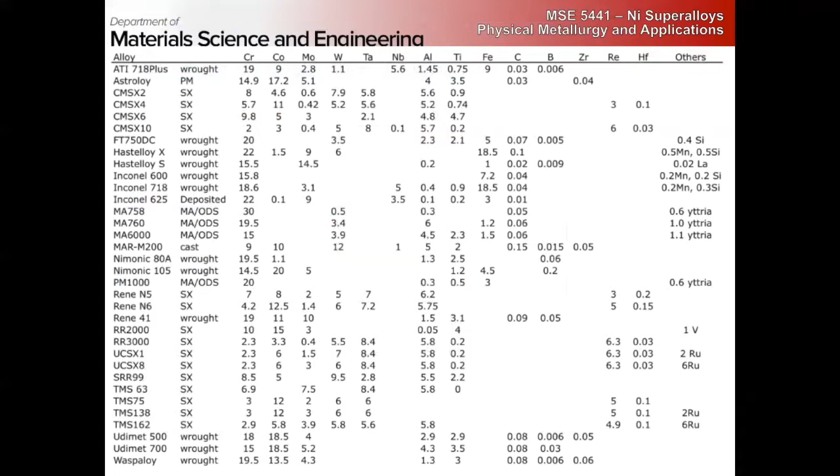It generally also doesn't contribute very much to the formation of carbides, which is also confusing, being that titanium and hafnium, which are also group 4 hexagonal metals, are very potent carbide formers here as well. So I need to wait for Professor Mills to get back from MRS and ask him what the deal is with zirconium in superalloys.

But we do know that it does segregate to grain boundaries and is important for additional creep strength because it lowers the grain boundary energy. Carbides are also very important for high temperature creep strength.

So there's added carbon at very small percent where they'll combine with the refractory elements and form these blocky carbides on the grain boundaries, that during service and heat treatment, they'll form lower carbides such as M23C6 and M6C, which form on the grain boundaries. And these are all based on the FCC crystal structure.

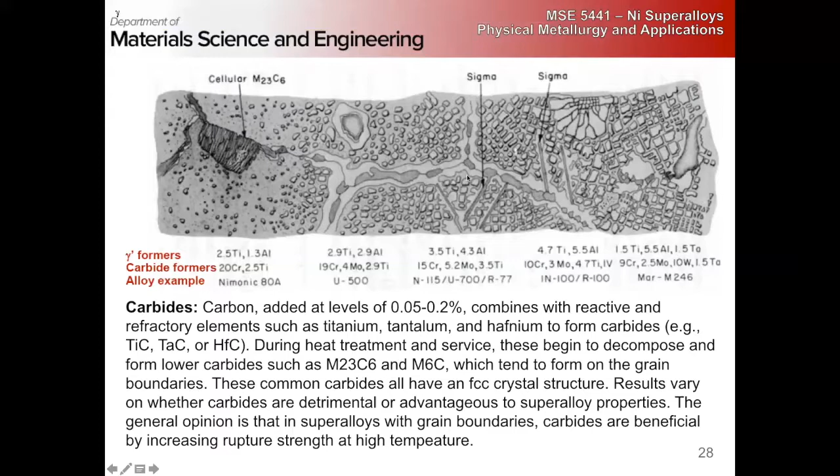So they can be fairly coherent. They are beneficial at high temperatures because they lead to the formation of these serrated grain boundaries, which are very favorable for creep.

Because at high temperatures, grain boundary sliding and grain rotation are critically important creep rate controlling mechanisms. So if you have a tortuous grain boundary like this, you do not have nearly the ease of grain boundary sliding.

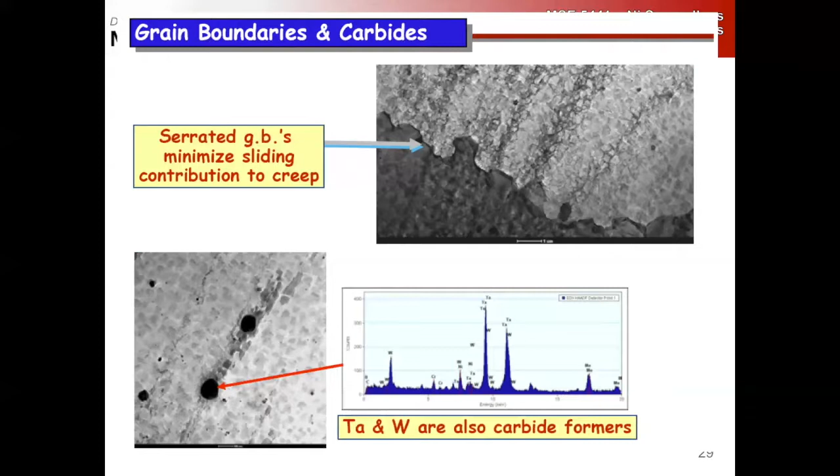So in the gamma matrix itself, we are primarily adding alloys for solid solution strengthening. And this basically just shows you for different elements a schematic of the increment in yield strength due to them being in solid solution.

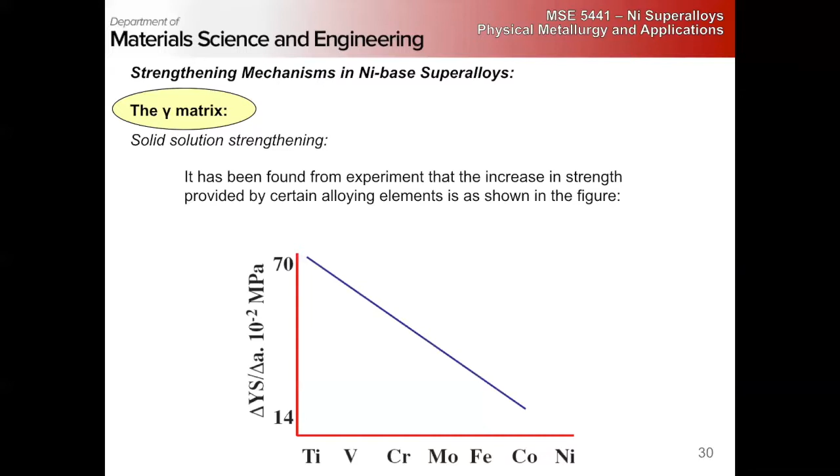And there's some empirical relationships that you can use to determine the effect of strengthening as a function of the alloy composition. And if we remember back to the very beginning, we know we have two main effects for solid solution strengthening: a lattice mismatch, lattice size effect, and also a modulus effect.

And we can look at the change in lattice parameter for all the different elements, and we notice something really interesting here. If we look at aluminum...

Aluminum is predicted to have the largest effect when you take the modulus effects into account as well. So in principle, aluminum would be a great solid solution strengthener for the gamma phase. The only problem is, where does it go? It partitions to the gamma prime.

So even though it's there and very potent, it is really added for its hardening purposes rather than its use in strengthening the gamma phase. That means tungsten, molybdenum, and chromium are primary solid solution strengtheners to the gamma phase.

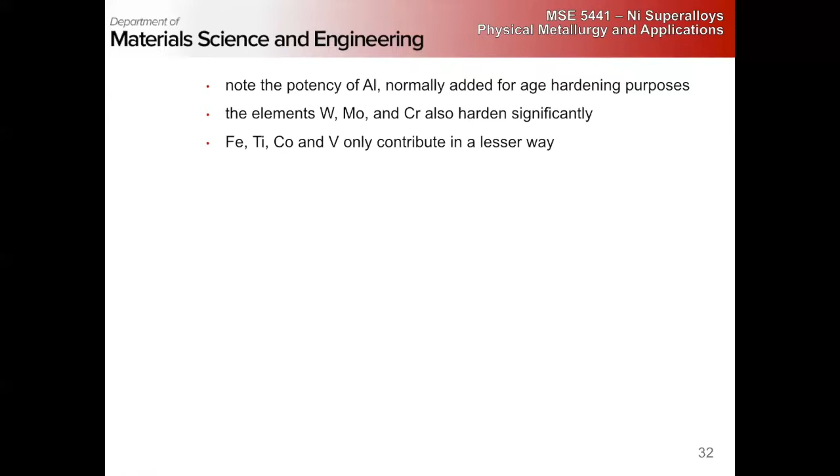Iron, iron-titanium - I saw TiCo and combined it together. Iron, titanium, cobalt, and vanadium only contribute in a lesser way. And this solid solution strengthening is going to persist to about 0.6 of the melting temperature, about 815 C. After that, we have just too much thermal activation.

And it's easy to get around - there's not a whole lot of interaction between the dislocations and the solid solution strengthening anymore.

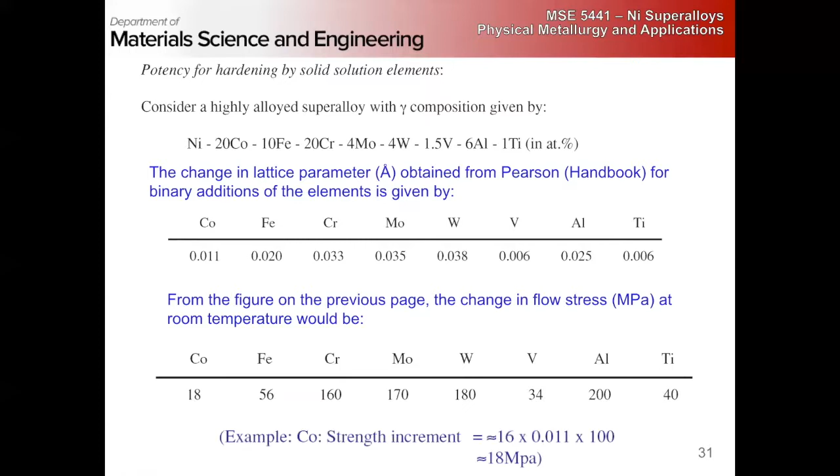Right. And then, back. Yes.

How do you measure the strengthening for just the solid solution? In the alloy, you also have the gamma prime, and the solid solution is also affecting the strength, and then there's also the anomalous yield.

For the gamma prime, you can measure the yield strength, and you can correlate it very well with hardness, right? Historically, this was done by Vickers indentation. Now it's done by nano indentation. You can correlate very well the relationship between yield strength and indentation strength.

So you can measure between the gamma prime particles, right? And generally these measurements aren't done on blade alloys where you have 80% gamma prime. These are done on lower strength, lower gamma prime fraction alloys.

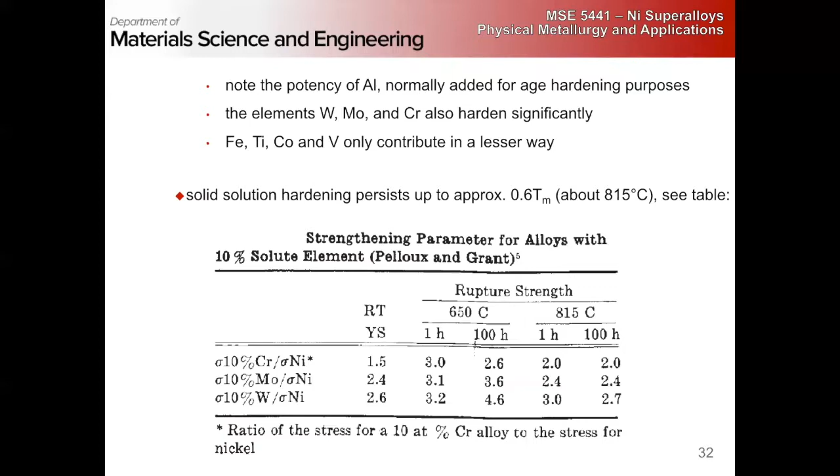Once we get above 0.6, we have diffusion to consider, as well as thermal activation of dislocations. So our strengthening is in some ways going to be limited by the diffusion of our alloying elements, and slow diffusers like molybdenum and tungsten are critical.

We also have to consider cross effects. These heavy refractories also slow the diffusion of titanium and chromium at even higher temperatures. So this strengthening in the gamma phase is relatively simple to think about at low temperatures, but under in-service temperatures it becomes quite complicated.

You have easy dislocation motion, relatively fast diffusion. So you have these refractories in there because they essentially keep the solid solution strengthening elements from catching up with dislocation motion, preventing dynamic strain aging type effects.

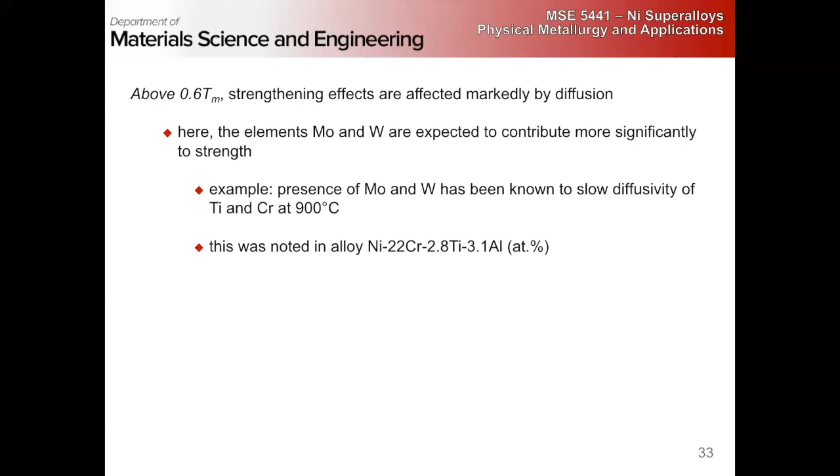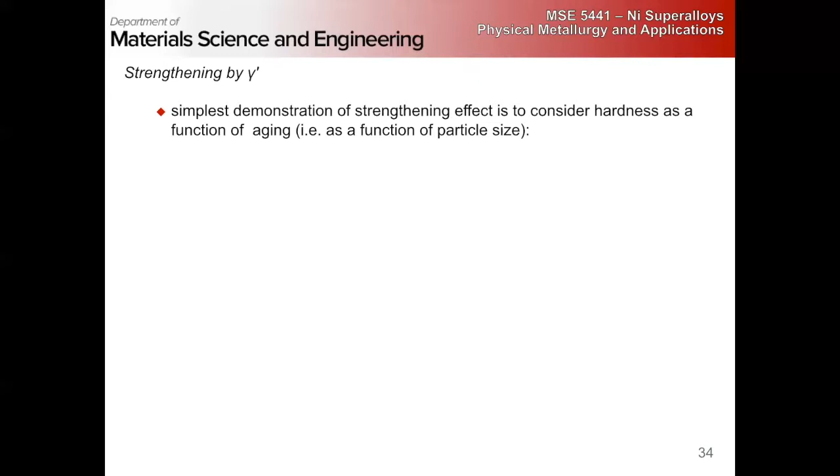In gamma prime, to a first assumption, we just think of it as we would any other precipitate. So that means the strengthening effect for a given volume fraction of gamma prime is going to depend on the particle size, and this mirrors what we saw before.

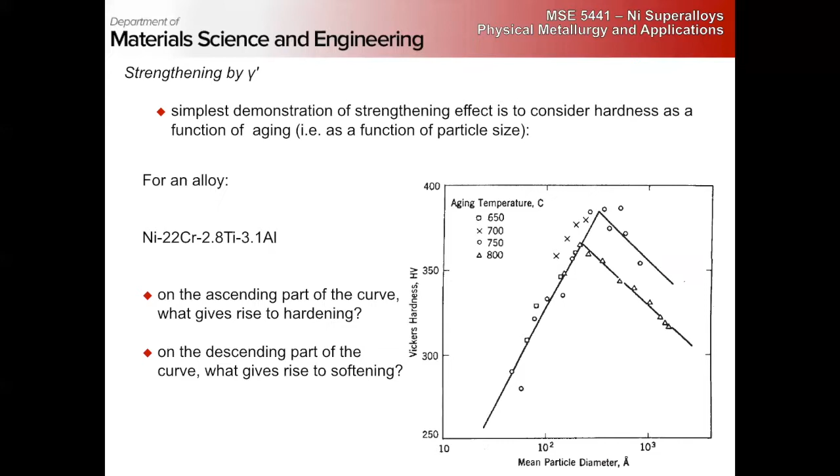You can think of this as being analogous to the cutting and looping curves, so that as we make the particles larger they become more difficult to cut, but eventually for a given volume fraction they become too far apart and it starts to become easier to loop. So something interesting happens.

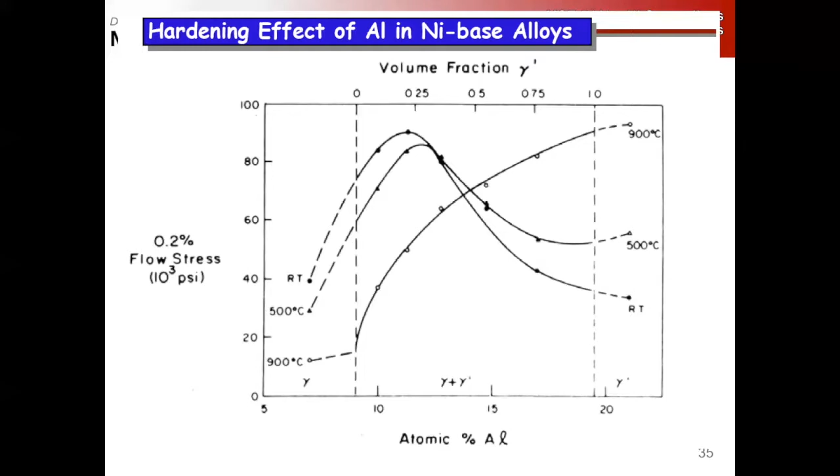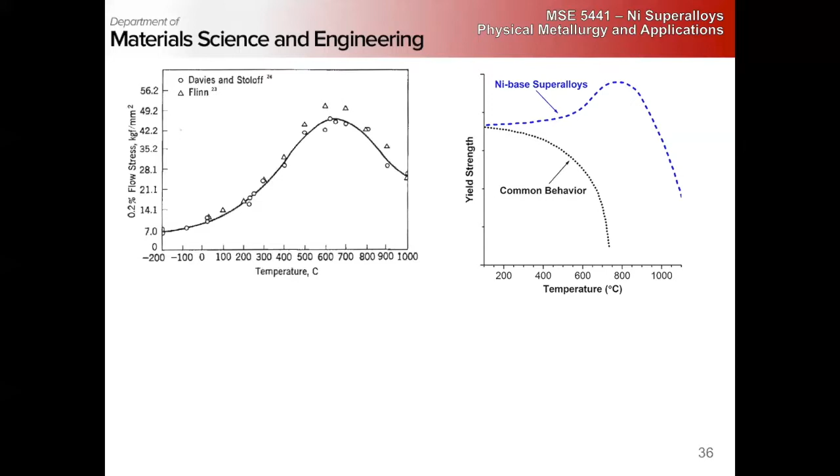Nickel superalloys are like any other. We primarily are relying on dislocation motion for plasticity, so we can start there. In FCC, we have a 1/2-110 dislocation.

So this is still in the gamma here. These are usually going to dissociate into two Shockley partials of type 1/6-211, separated by a stacking fault between the two.

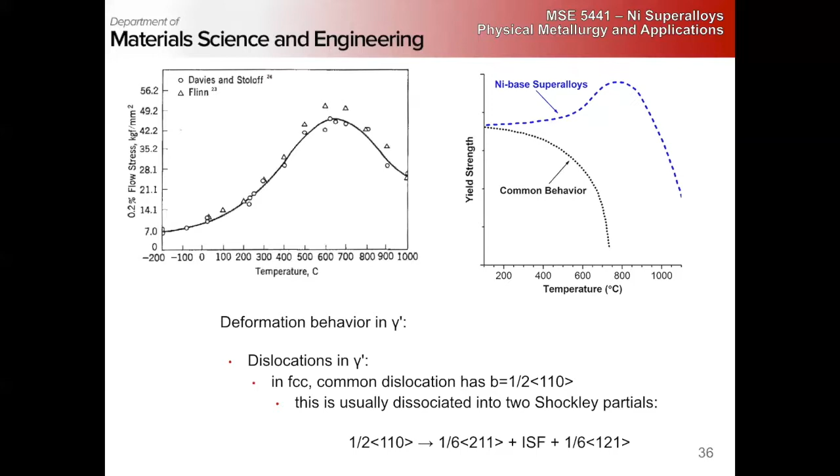So if we look at what happens in the gamma prime, for a full 1/2-110 dislocation to move, we need the nickel atom to move onto the aluminum sublattice and the aluminum atom to move onto the nickel sublattice. So a full FCC dislocation...

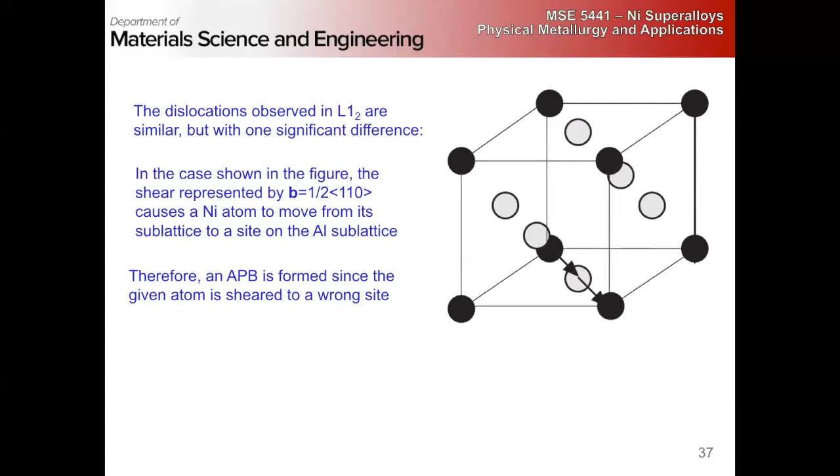...is a superpartial in the gamma prime, the L12 structure, and its passing leaves behind an antiphase boundary where we have mismatch. So we need two full 1/2-110 type dislocations to bring it back into correspondence. Generally, we have 1/2-110s that are full FCC dislocations, but partials in the L12 with an antiphase boundary separating them.

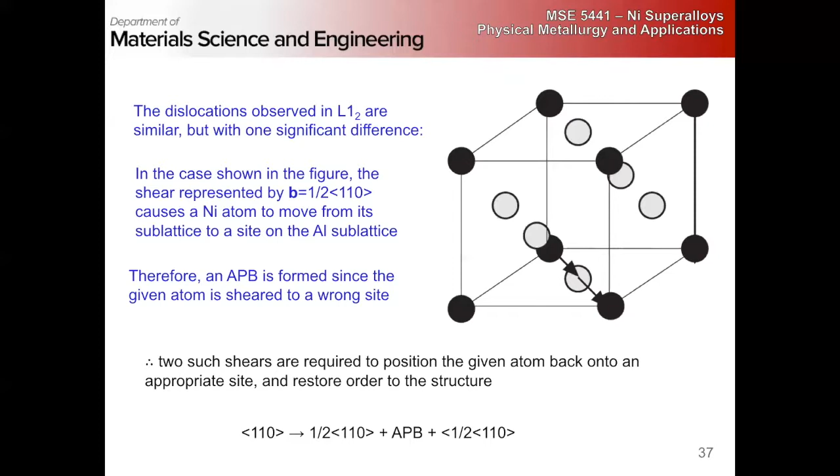All right, so each of these superpartials, though, can also dissociate into a pair of Shockley-like partials.

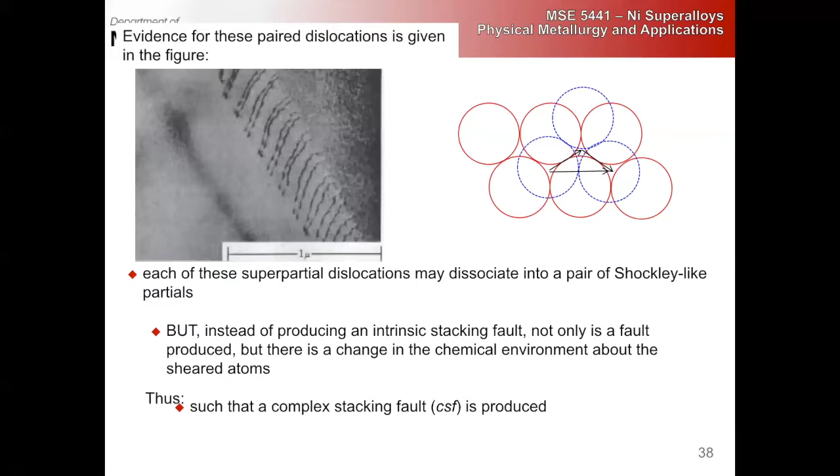But instead of producing an intrinsic stacking fault like it would in the gamma, we have a change in the local chemical environment, so we produce a complex stacking fault. So generally what we have in the gamma prime: first a Shockley partial from the gamma leaves behind a complex stacking fault. Another one comes by, leaves behind an antiphase boundary. Another comes, leaves behind another complex stacking fault. Another comes and restores us to normal order.

And of course, these faults all have different energy, so the separation of these partials is going to be dependent on the energy. These complex stacking faults are higher in energy, so they're going to be much narrower. The Shockley partials are going to be much closer to each other than the ones that create the antiphase boundary - roughly about 10 times as long.

Here we can see these are the Shockley partials, at the gamma prime interface. These are wrapped around - the geometry is difficult to get your head around when you first start thinking about these things. But we have loops of partials in the gamma that wrap around the gamma prime particles.

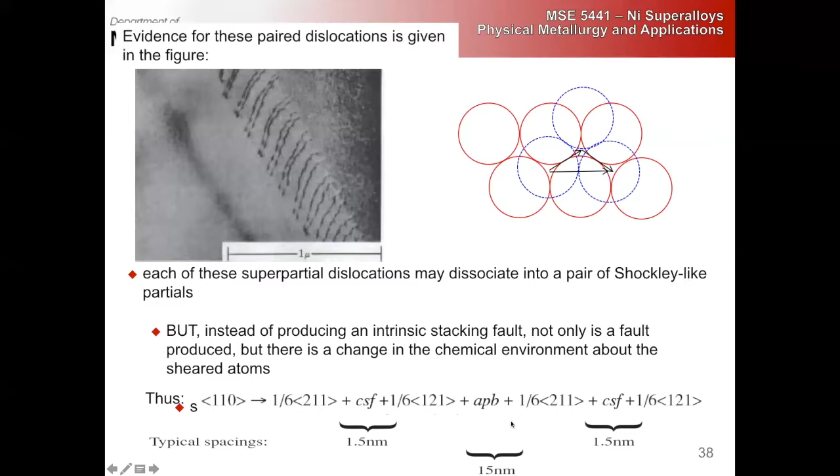Okay, so this explains why gamma prime is such a good strengthener, but it still doesn't explain the anomalous hardening. So we're working towards that. We know that the yield stress of the gamma prime increases with temperature.

So what dislocation mechanisms do we have available to us that also increase with temperature? Kear and Wilsdorf came up with this idea, and they said cross-slip seems to fit the bill. The ease of cross-slip goes up as temperature is increased. But the question is, cross-slip from what onto what?

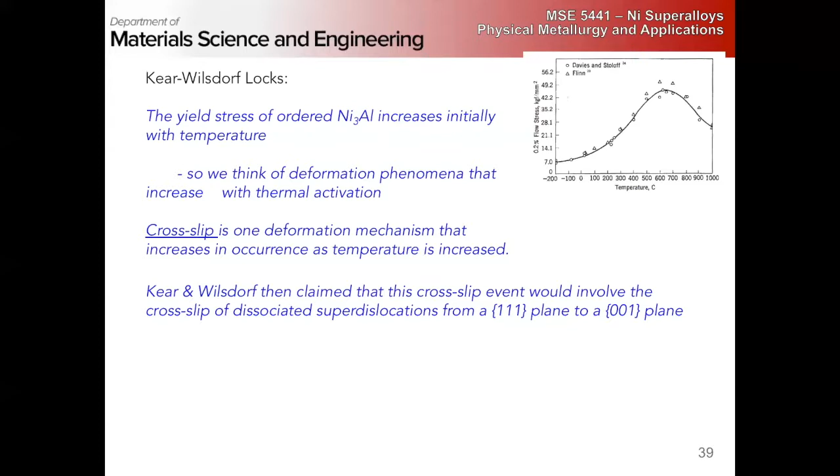So they claim that these partials are going to be cross-slipping from the 111 plane, where they typically want to reside, onto a cube plane, onto the 001 plane. So why on earth would this happen? They made some estimates and said that the antiphase boundary energy is much higher on the 111 planes than on the 100 planes. So you've got these partials that are separated, they have an antiphase boundary. If they change planes, they can reduce that fault energy quite a bit.

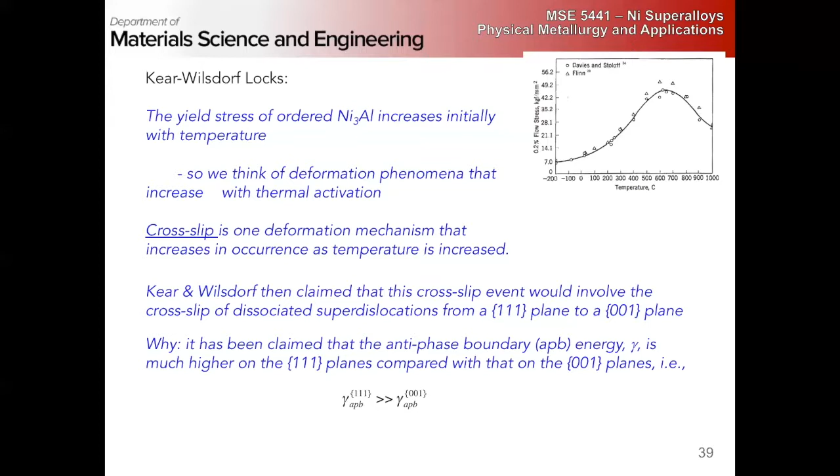So basically, the picture looks like this: we have two partials on the 111. They both cross-slip onto the 001 plane, and now they're spaced farther apart because this boundary energy is lower. They can be farther apart and still reduce the energy.

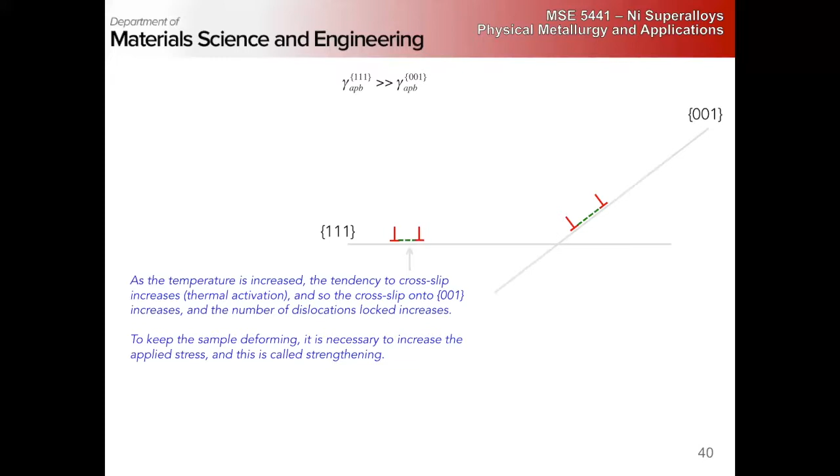And so essentially, they can't glide on the cube plane - they're sessile. So these dislocations are now locked. The only way we can get them to move is to increase the applied stress. Therefore, it strengthens the material.

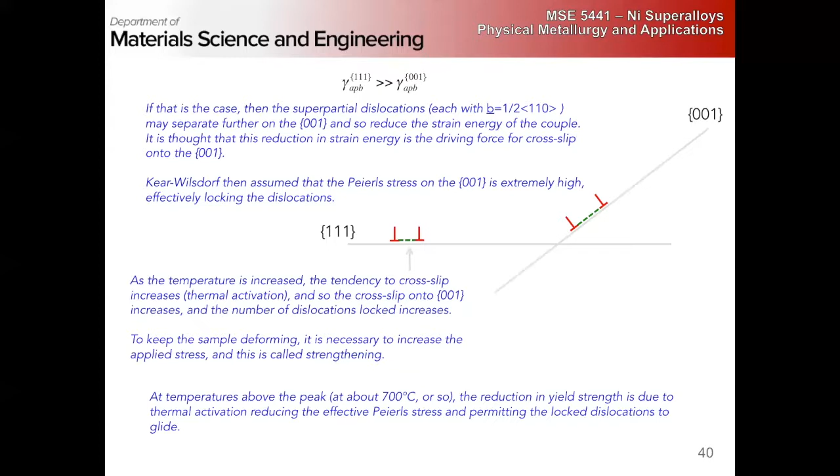So now what happens once we get above the peak? We now have enough thermal activation to reduce the critical stress, and are able to move these dislocations, permitting them to glide primarily by cross-slipping back onto the 111 planes. So that's the idea.

It turns out it doesn't work nearly that nicely. People did a lot of experimental work and showed that the antiphase boundary energy on 111 isn't that much greater than on 100. And Kear and Wilsdorf essentially did all their calculations considering only isotropic dislocation interactions. If you actually take the anisotropy of the gamma prime phase into account, the interactions become a lot more complicated - the mathematics become much more difficult.

But what the folks behind the PPV model did is they essentially did that, and they came up with calculations that show that the strain energy of the superpartials becomes lower when the dislocation is on the 001 rather than the 111. So it's not the antiphase boundary energy, but the elastic energy due to the neighborhood distortions caused by the core of the dislocation.

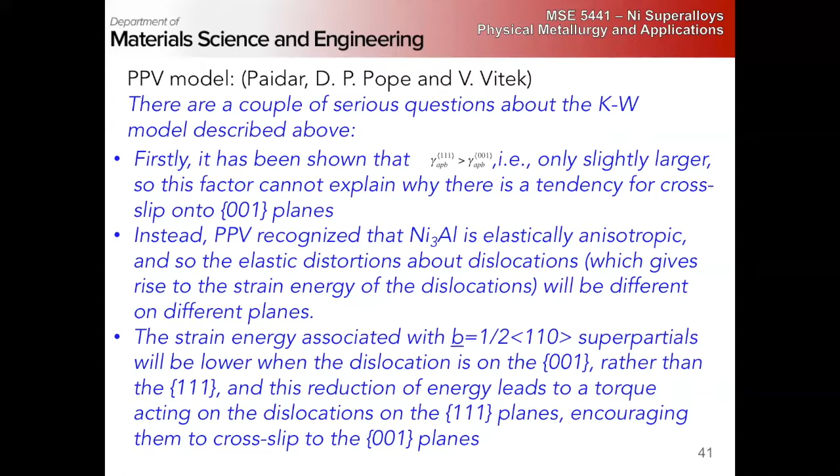This picture can explain the increase, but how does it explain the reduction, why it doesn't continue? It's just a thermal activation argument - essentially, you get enough motion that you reduce the critical stress, and once they start moving, they cross-slip back onto 111. I don't have a really good, solid answer for this. I don't know if anyone's actually really done the atomistic simulations.

It's not an easy simulation to do.

There are reports of it, right? But you have to look at it at high temperatures, right? So it's not an easy thing, right?

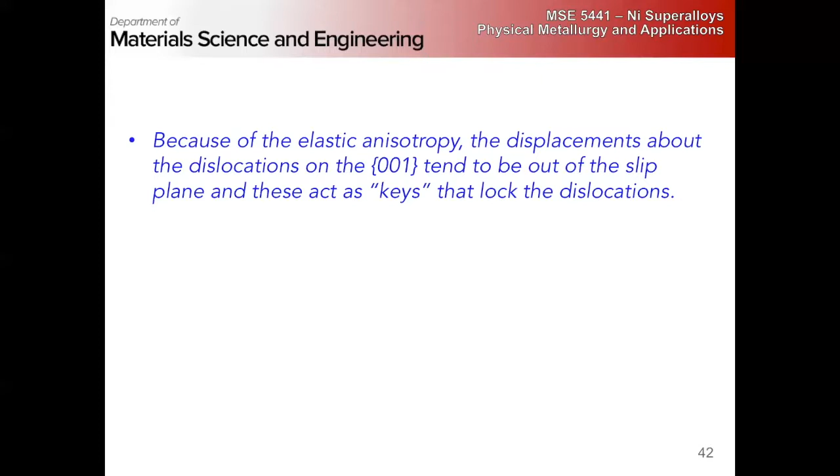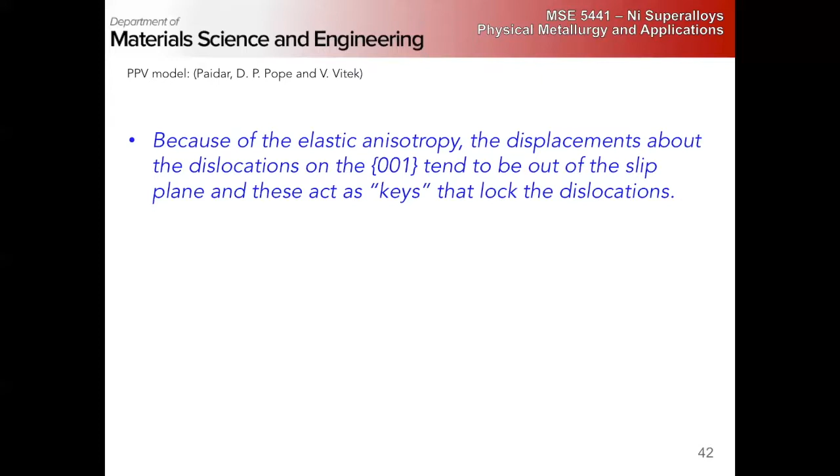This is still very much kind of open, I would say, right? I don't think this is settled. The basic ideas are there, right, that we have a cross-slip mediated lock that forms, but the details of it are still... right. The number of phenomena that we've mentioned that we don't have a really 100% clear picture of is probably more than the ones that I said that we do, right?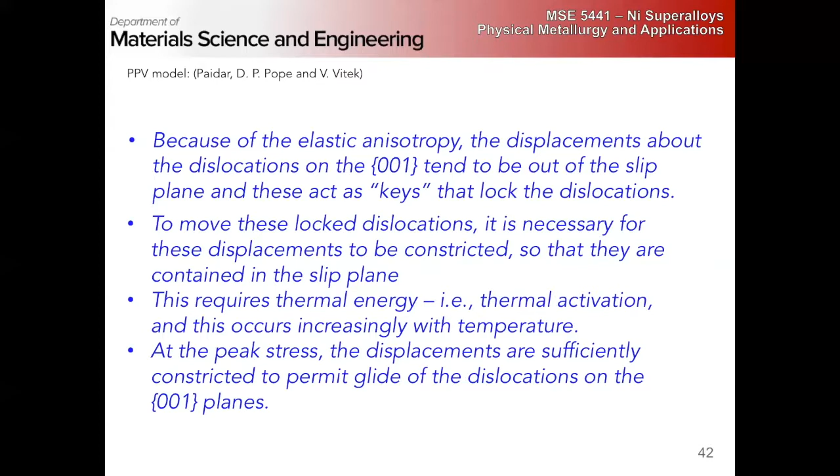So, I have a couple bullet points here that talks about constriction and thermal energy, right? You have displacements that are out of the slip plane, but this is still a very hand-waving argument, right? And so take it with definitely a bit of a grain of salt, right?

Now, what's our turbine temperatures that we talked about before, right? We were talking about turbine inlet temperatures of 1400 to 1500 C, right? So we don't have this increase in strength anymore. It falls, right? But the fact that it's still stronger than any other alloy, right?

So don't get confused, because a lot of people wrote this last year on the exam, that the superalloy retains all of its strength at high temperatures. That's definitely not true, right? There is a clear drop in strength with increase of temperature. It just retains a larger fraction of its strength at high temperatures than other alloys, right? You can't get around the thermodynamics of the situation.

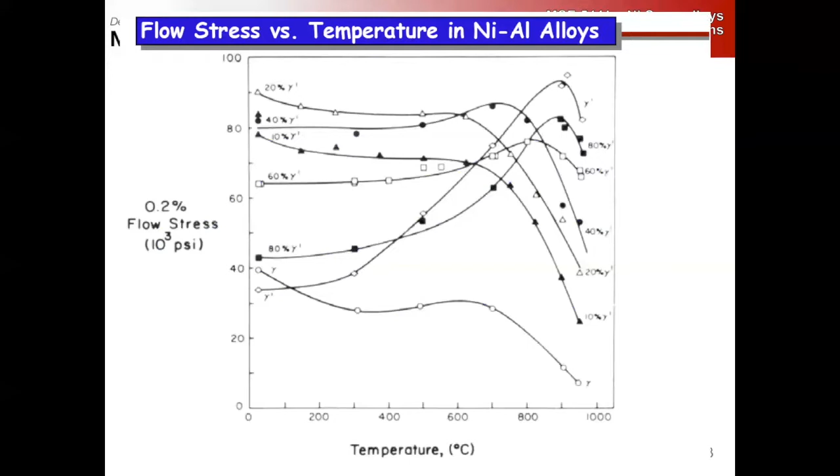But trends, right? I like trends, right? So nice, pretty big picture kind of stuff. Okay, so as we... the question was perfect because it was a great lead-in, because the composition also is going to affect the APB energy and fault energy, right?

Certain alloying elements might reduce these fault energies, others might increase them. The gamma prime strength is also a function of composition, and so is diffusion at elevated temperatures - do you have heavy refractories in there or not? The coherency strains are a direct function of composition too, as are the modulus mismatch and phase fractions. These are all explicit functions of composition.

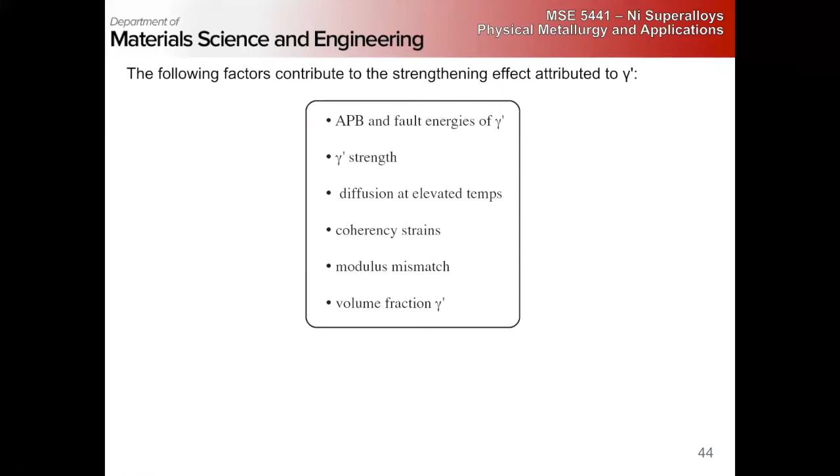So that was a perfect example. This is just the APB and fault energies - this is the same picture that we had before.

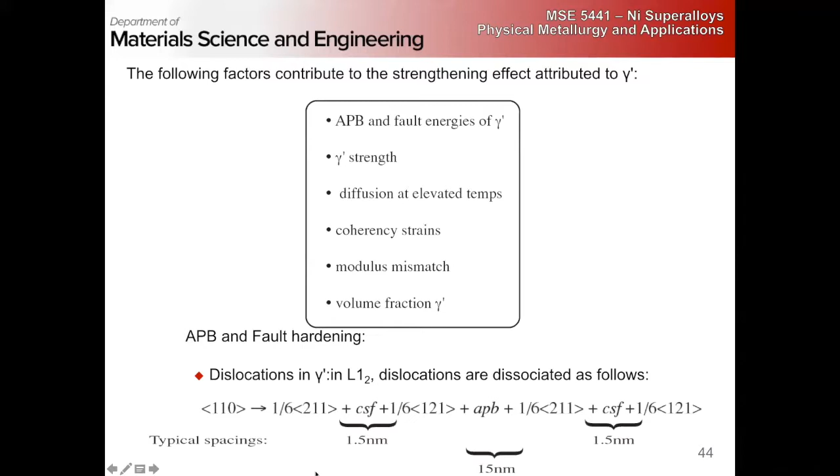We do, even though we have a perfect order that is reestablished after the passing of two same-signed 1/2-1-1-0 dislocations, we still get really significant strengthening.

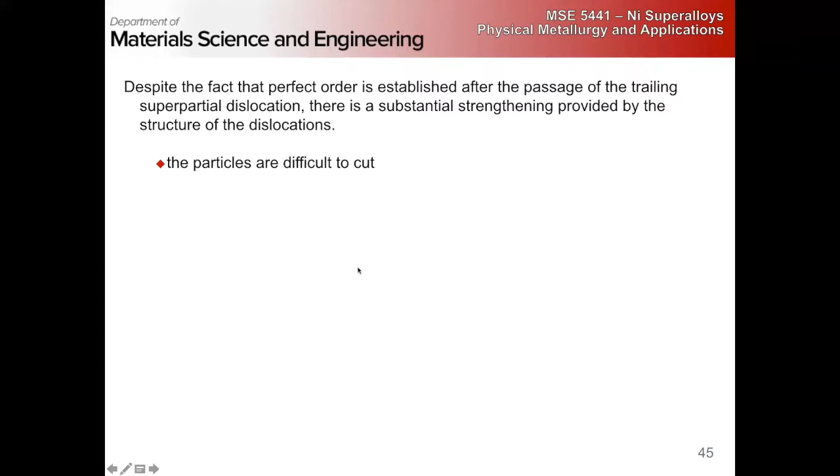We talked about some of the reasons why the particles are difficult to cut. A single dislocation comes in, and by entering the gamma prime phase, it increases the energy quite a lot. So if we had perfect 1/2-1-1-0s, which we don't - we have Shockley partials, but just imagine we do - the first one comes up and basically just hangs out at the interface. It's not going to cut in because the energy cost to create an APB is too high.

So essentially it waits until a second dislocation of the same sign comes up. But since they're the same sign, they're repulsing, so you have to bring them close enough together for them to cut, so that the width of your APB interface is small.

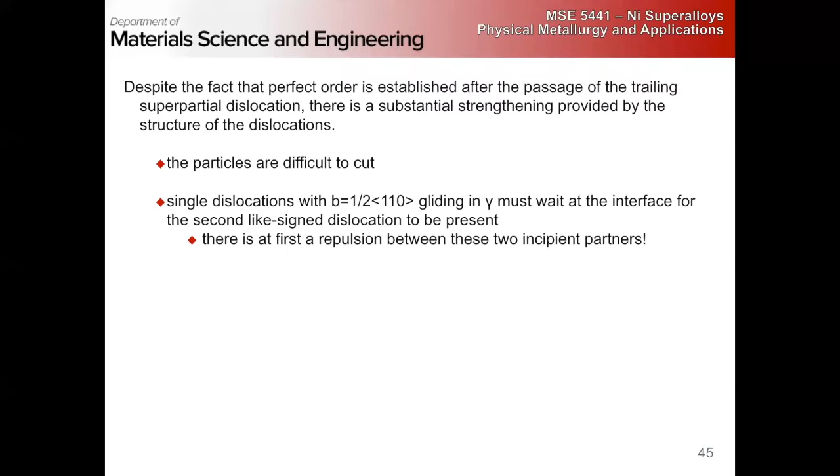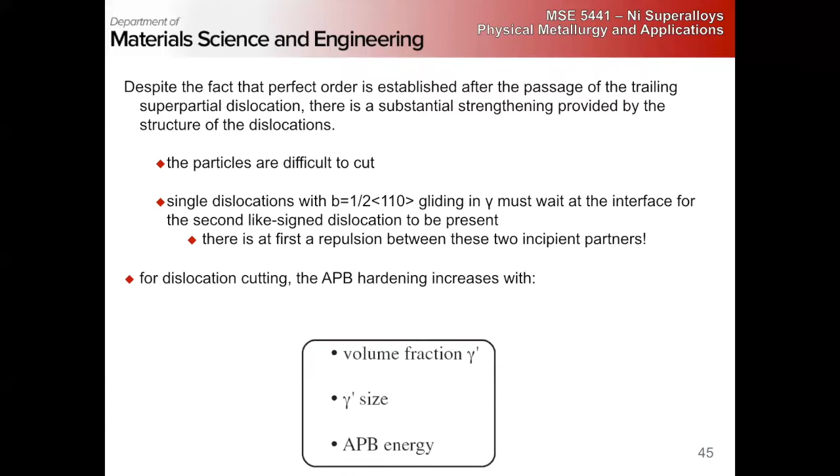The same types of reactions become even more complicated when you take partials into account. A lot of the mechanisms involve local reordering to reduce fault energy. So you have to have Shockley partials of the right type, either on the same plane or separated by one lattice plane. There's a significant chance and time effect involved in getting the right dislocations to cut through the gamma prime particles, because otherwise the energy cost is just too high.

We also have solid solution strengthening of the gamma. It's not as strong.

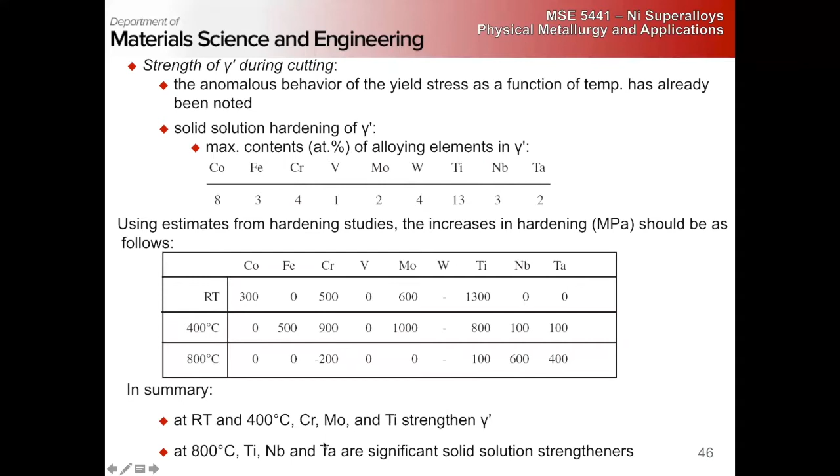Oh, I'm looking at the wrong table. This is the max atomic percent that you can put in here. Titanium is quite a strong solid solution strengthener. Chromium is interesting because it's a strengthener at room temperature, but at elevated temperature it leads to a weaker gamma prime. Titanium, niobium, and tantalum are the major solid solution strengthening elements.

During creep, we have to take diffusionally mediated mechanisms into account. So again, the heavy, slower diffusing, high melting point refractory metals are very good for providing additional strength in gamma prime.

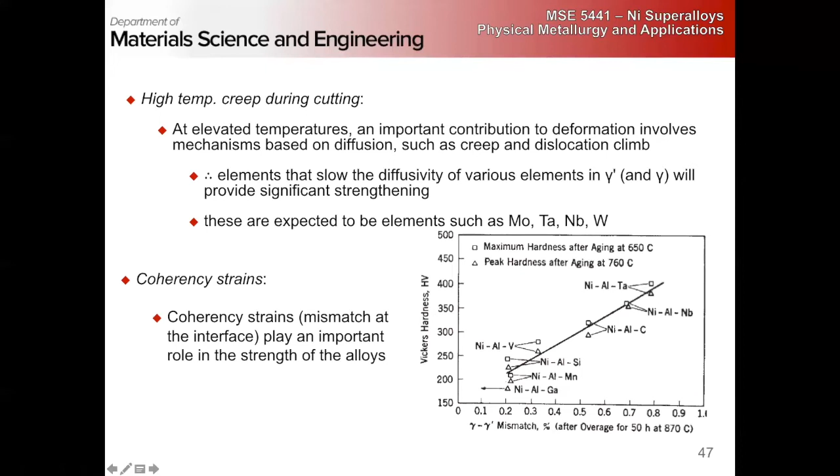Somehow when revising these, I deleted the bullet point there - so make a note that we have to consider the gamma prime modulus for counteracting purposes. Sometimes you might want to add an alloying element to increase carbide formation, but then it's going to decrease your coherency strains. So everything has to be taken together - there's a lot of trial and error optimization that goes into these.